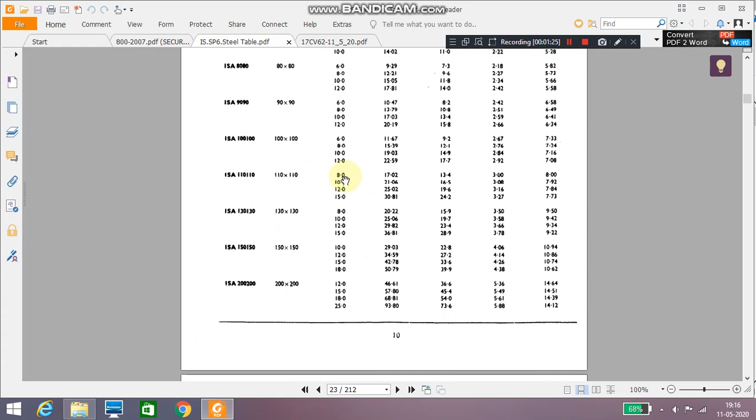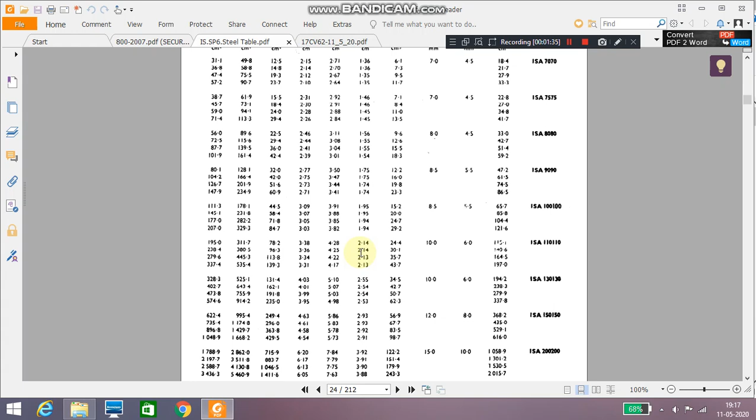Now from steel table, let us collect the properties of ISA 110 by 110 by 10 mm. In SP6, page number 11, we have ISA 110 by 110 by 10 mm. The area is 21.06 and RVV equal to 21.4 mm, which can be seen in the same page.

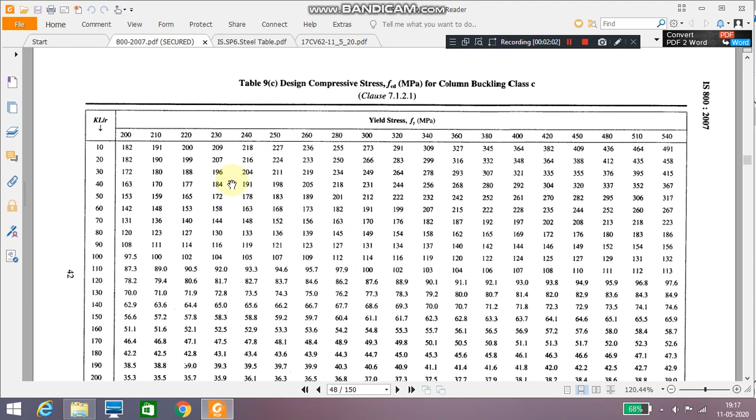Now let us take up first case: both ends are fixed. So from clause 7.5.1.2, page number 48, IS 800-2007, we have not touched this clause yet. Let us go to that clause, page number 54. This is a case where the angles are loaded through one leg.

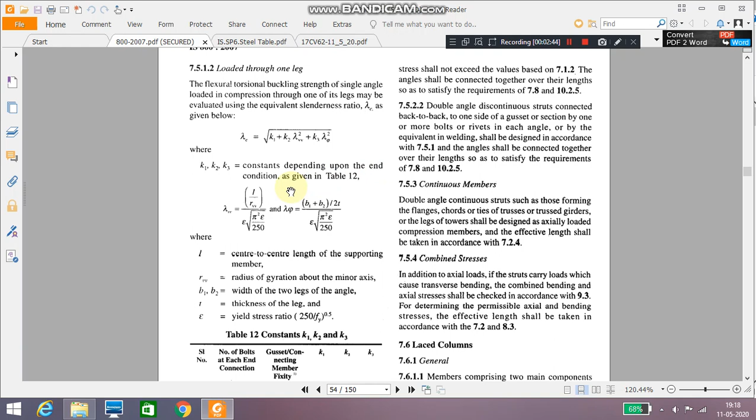The flexural torsional buckling strength of a single angle loaded with compression through one of its legs may be calculated by using equivalent slenderness ratio lambda E as given below: lambda E equal to square root of K1 plus K2 into lambda VV square plus K3 into lambda phi square, where K1, K2, K3 are constants which depend upon the end conditions given in table number 12, which is in the same page.

Now lambda VV equal to L divided by RVV, divided by epsilon into square root of pi square into E divided by 250, and lambda phi equal to B1 plus B2 divided by 2T, divided by epsilon into square root of pi square into E divided by 250, where epsilon is nothing but the yield stress ratio 250 divided by Fy to the power 0.5.

So usually this value will be 1 because Fy will be 250 Newton per millimeter square. L is the center to center length of the supporting member. RVV is the radius of gyration about the minor axis. B1 and B2 are the widths of the two legs of the angle, and T is the thickness of the leg.

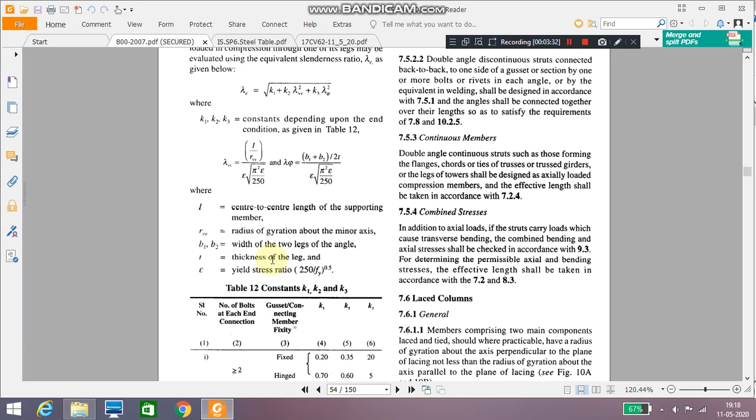Now in table number 12, the constants K1, K2, K3 are chosen depending upon the type of support. If number of bolts at each end connection is greater than or equal to 2, then if fixed we have K1 equal to 0.2, K2 0.35 and K3 20. If hinged, 0.7, 0.6 and 5.

If number of bolts at each end is equal to 1, then if fixed, K1 is 0.75, K2 is 0.35 and K3 is 20. If hinged, 1.25, 0.5 and 60.

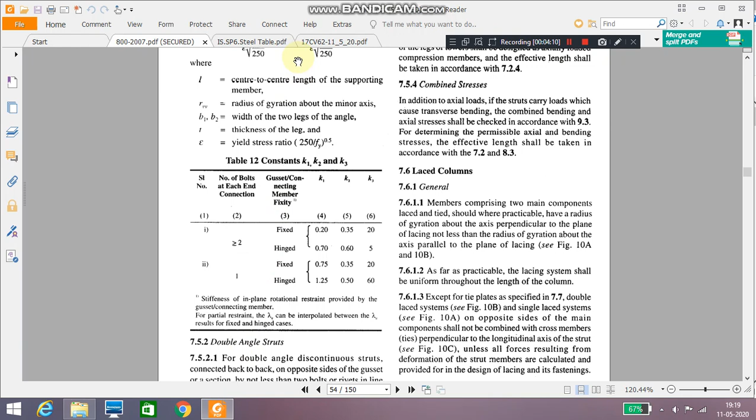Now we will continue with the problem. So this is the clause, and from the table 12, for this case with one bolt connection and considering it as a fixed end, K1 equal to 0.75, K2 equal to 0.35 and K3 equal to 20, and we will evaluate lambda VV.

Lambda VV equal to L divided by RVV, divided by epsilon into square root of pi square E divided by 250. Upon substitution we get 1.315.

Then let us calculate lambda phi. Lambda phi equal to B1 plus B2 divided by 2T, divided by epsilon into square root of pi square E divided by 250. In both formulas, the denominator has the same term. Here B1 equal to B2 equal to 110 mm because it's an equal angle, and T equal to 10 mm. Substituting all the data, we get the answer as 0.124.

Now therefore lambda E equal to, substituting in the formula, we get 1.289. Once we get lambda E, we can compute the design compressive stress FCD equal to Fy divided by gamma m naught, divided by phi plus phi square minus lambda E square to the power 0.5, where phi is nothing but 0.5 into 1 plus alpha into lambda E minus 0.2 plus lambda E square.

The alpha value is the imperfection factor, given in page number 35, table number 7. For buckling class C, alpha equal to 0.49. Substituting, we get phi equal to 1.597. Therefore FCD works out to be 89.484 Newton per millimeter square. Correspondingly, we can calculate the design compressive strength, that is the load PD equal to AE into FCD. We get 188.45 kilonewton.

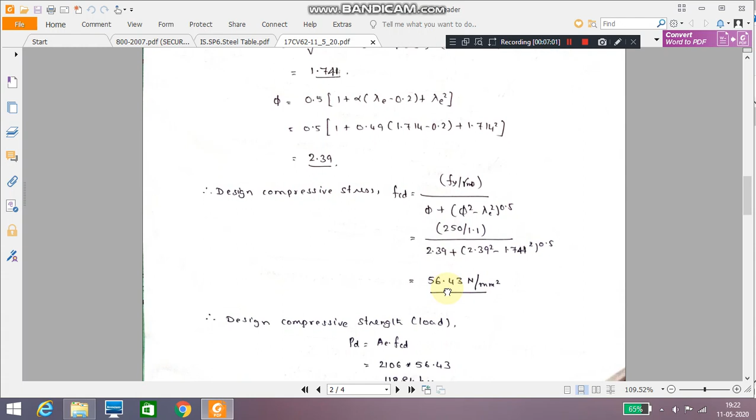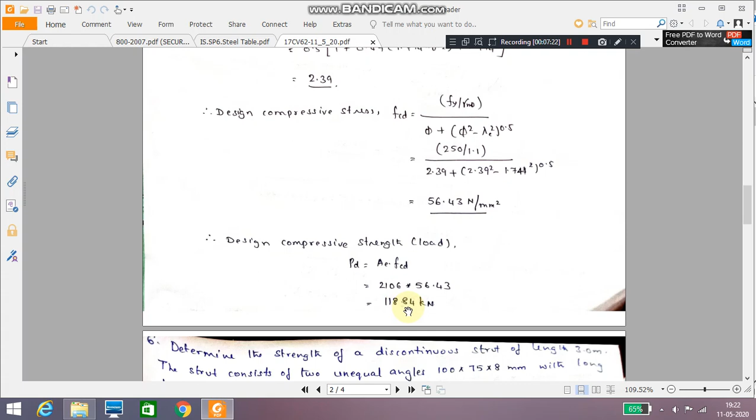Therefore, design compressive strength compared to the previous case comes out to be little bit lesser for the hinged end. So, PD equal to AE into FCD works out to be 2106 into 56.43, works out to be 118.84 kilonewton. So, this type of problem is very important.

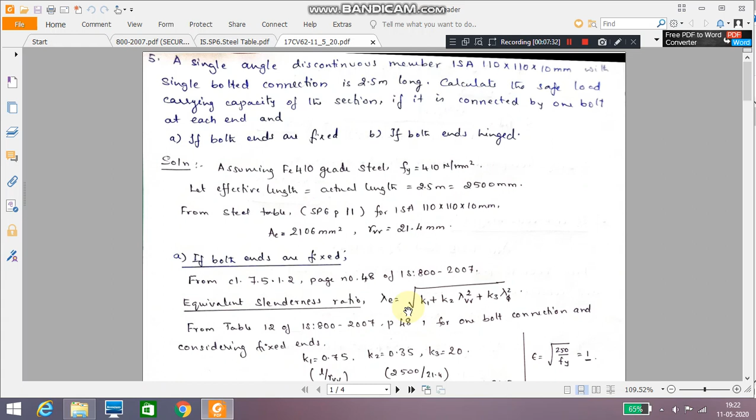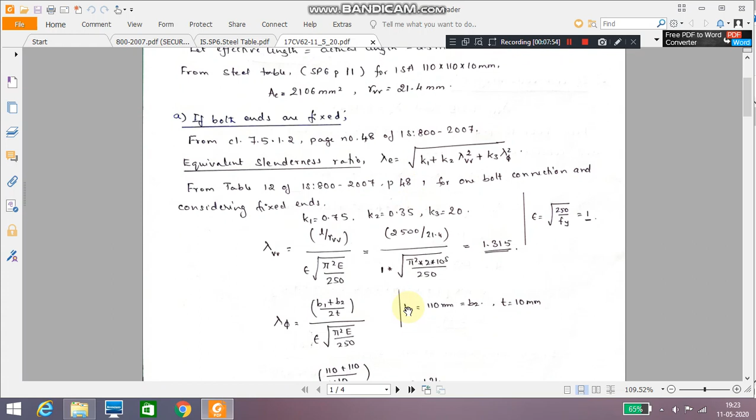If you refer to a previous question paper, you can get this type of problem also. So whenever you have a discontinuous member, like a single angle discontinuous member, you have to follow this procedure given in clause 7.5.1.2, page number 48. Here table number 12 is important to evaluate the values of K1, K2, K3 depending on the boundary conditions or type of support.

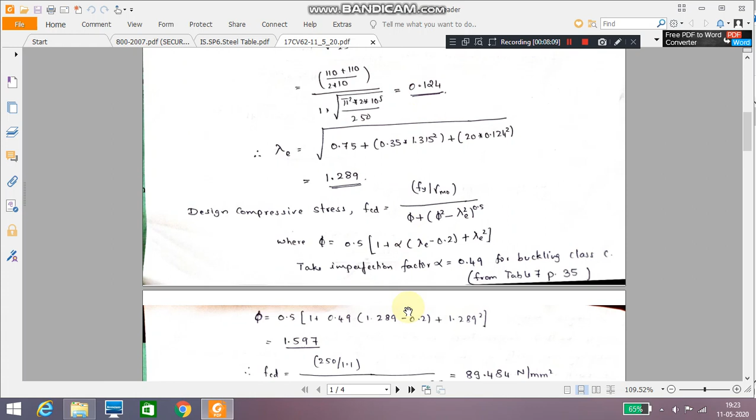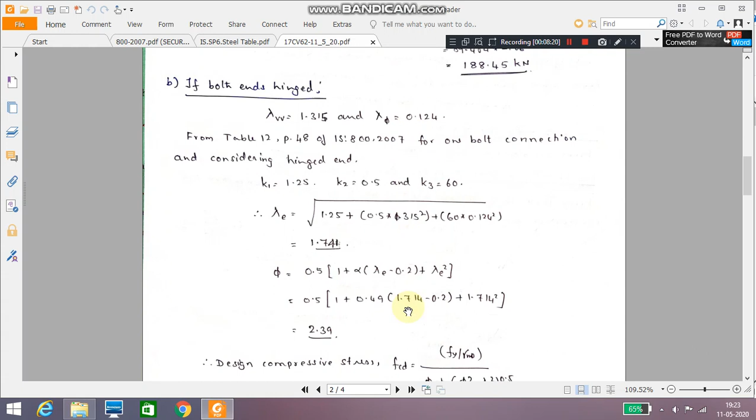Evaluation of lambda VV and lambda phi is also important, and hence lambda E is also important. After that, the formula is already known for us: Fy divided by gamma m naught, divided by phi plus phi square minus lambda E square to the power 0.5, where phi also has a formula to compute it. Hence to calculate the design load PD. Thanks for watching. We will continue with few more problems in the coming video lecture.